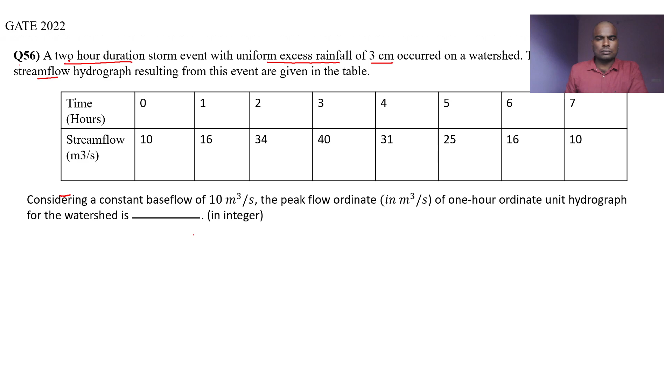This question is as follows: a 2-hour duration storm event with a uniform excess rainfall of 3 centimeter occurred on a watershed. The ordinates of the streamflow hydrograph resulting from this event are given in the table. Please note down, this is a 2-hour duration storm event with a rainfall excess of 3 centimeter, and this particular event resulted in the stream flow hydrograph of these ordinates.

The question is to consider a constant base flow of 10 meter cube per second and calculate the peak flow ordinate in meter cube per second of the 1 hour unit hydrograph. Please note, they asked to calculate the 1 hour unit hydrograph. In the question they have given a 2 hour storm event and corresponding hydrographs, but they have asked you to calculate the 1 hour unit hydrograph. And this question is for 2 marks.

Since this question is for 2 marks, we need to do some computations to solve it. Before proceeding further, I wanted to ask you guys, does anybody have an idea how we can solve this question? Anybody willing voluntarily, you can respond, it need not be exact.

So, a 2 hour duration storm event with a uniform excess rainfall of 3 centimeter on a watershed. The ordinates of stream flow hydrograph resulting from this event are given below, and additionally they have mentioned that a constant base flow is to be considered. So it has asked to calculate the peak flow ordinate in meter cube per second for the 1 hour unit hydrograph.

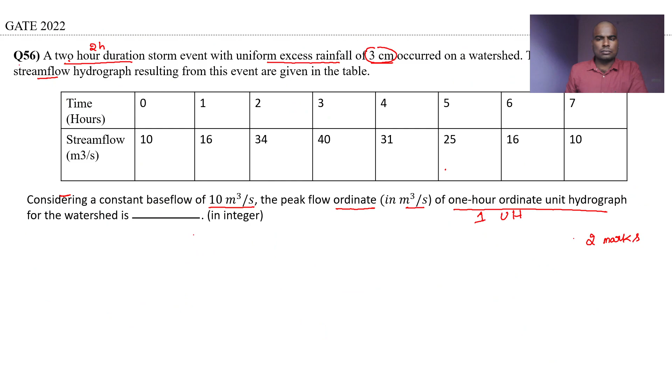Now let's deduct the base flow to get the direct runoff hydrograph. Why are we deducting the base flow? Because this base flow is not from the current event - it may be contributed by groundwater, or from a previous event. Our intention is to calculate the unit hydrograph for this excess rainfall amount, so we will remove the base flow from this.

By removing the base flow: 10 minus 10 will be 0. 16 minus 10 will be 6. 34 minus 10 will be 24. Similarly for all other steps.

Here you can see 25 minus 10 will be 15, 16 minus 10 will be 6, 10 minus 10 is 0. Please note down, in the direct runoff hydrograph, the first ordinate and the last ordinate will be 0 only, and this will even continue for the unit hydrograph also - the first and last ordinates must be 0. Please note, if these ordinates are not 0, then you might have made some mistake, so please check that. Now column 4, here I have written the formula for how we got this.

So column 4 will be column 2 minus column 3. Column 2 is the stream flow and column 3 is the base flow. By deducting these elements element-wise, we get these values. Now to get a 2-hour unit hydrograph, we need to divide column 4 by 3 centimeters, because this is a direct runoff hydrograph which resulted from the 3 centimeter rainfall excess.

I hope all of you know the definition of unit hydrograph. Unit hydrograph is a hydrograph which resulted from uniform rainfall intensity over an entire catchment.

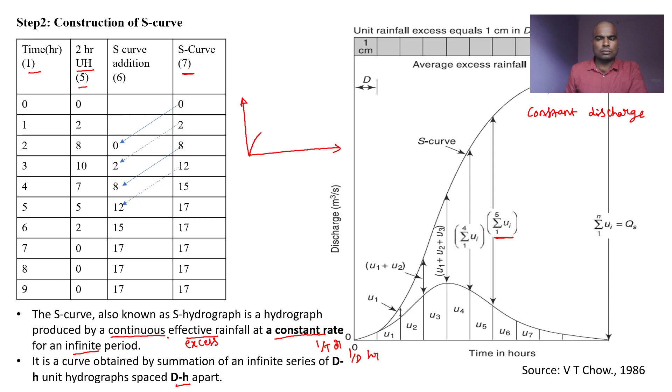Let's say this is the 2-hour unit graph we already got from the previous step. Let's say I have lagged this unit graph by 2 hours and performed this sum. So let's say this is 1, 2, 3, 4 - correspondingly this will have one value, this will have another value, and so on. If you observe between 0 to 2, whatever values are there will directly appear in the S curve. But from the second period onward, these values will get summed up. Can you note it down? Please observe, this is a critical point here.

In this question, they have given ordinates at 1 hour interval, but the unit graph what we have is a 2 hour unit graph. This is where we all make mistakes. Many people will simply lag these 2 times and add all the points. That is not correct. Please note down.

So observe critically. What I'll do is take these first 2 ordinates and directly put them in column 7. Now these 2 ordinates I'll shift together and place here in column number 6. This column is called the S curve addition. Now sum these two and place here: 8 plus 0 is 8, 10 plus 2 is 12.

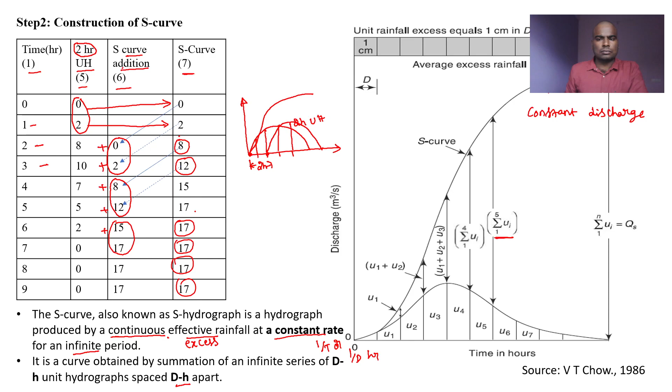So this is step 2. Now this is the final step. We have the S curve, and from the S curve how can we generate the T hour unit graph? It is the same procedure I demonstrated earlier. Consider two D hour S curves A and B, here 2 hour, displaced by T hour. In our case we need a 1 hour unit graph, so T will be 1.

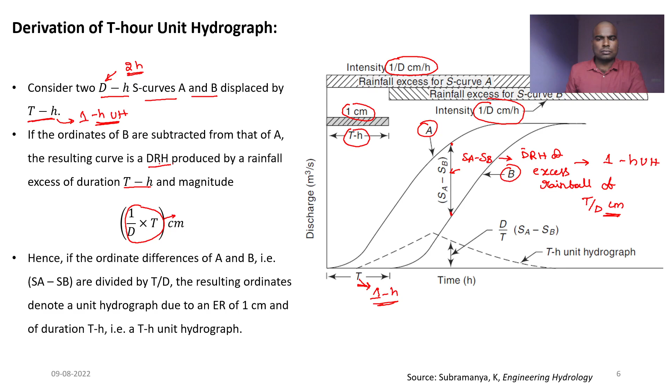Now from this DRH, with T being 1 hour in our case, we need to calculate the 1 hour unit graph. We simply divide this DRH by the T/D excess rainfall depth, and we get the T hour unit graph. This is the procedure.

Observe the column numbers again. In the previous step I stopped at column number 7, so I start with the same column 7. Time is 0, 1, 2, 3, 4, 5, 6, 7. I have added 2 extra rows because we are lagging the curve, just to be on the safer side, but these ordinates will be 0 only, so there is no issue. This is the S curve obtained in the previous step: 0, 2, 8, 12, 15, 17 and so on.

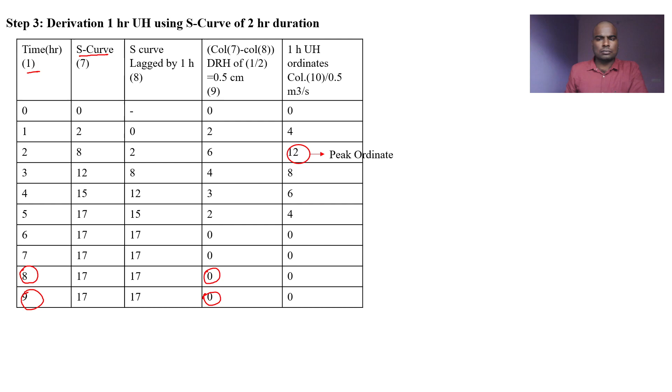Now lag this S curve by 1 hour because we are asked to calculate the peak ordinate of the 1 hour unit hydrograph. If asked the peak ordinate of a 3 hour unit hydrograph, we would lag by 3; if 2 hour, in a similar manner. So we have lagged by 1 hour, and these ordinates go here.

Now we deduct column number 8 from column number 7. 0 minus 0, 0 minus dash is 0 only. 2 minus 0 is 2. 8 minus 2 is 6. 12 minus 8 is 4. Similarly the others. So this is the DRH of 0.5 centimeter excess rainfall.

So now we need to calculate the 1 hour unit hydrograph. So how will you get the 1 hour unit hydrograph? This is column number 9. Sorry, this is my mistake. This is column number 9, and this is column number 10. So divide column number 9 by the 0.5 centimeter. By doing that, we will get the ordinates. So if you observe, what is the peak ordinate here? 12. So this is what they have asked to calculate.

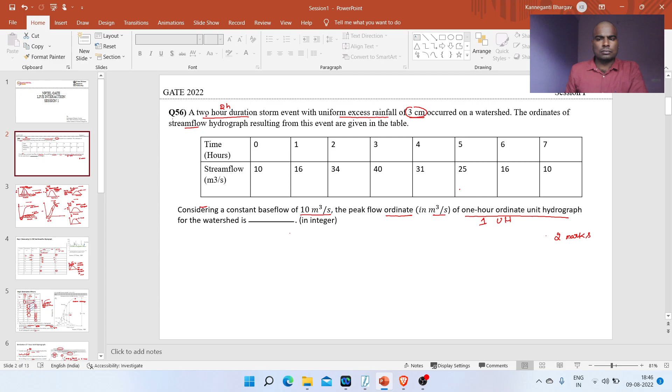So if you observe what they have asked, they have given a 2 hour storm event and the 2 hour stream flow hydrograph, but they have asked you to calculate the peak flow ordinate of the 1 hour unit hydrograph. If you observe column number 5, this is the 2 hour unit hydrograph which we calculated from the stream flow. Observe this carefully. You subtract the ordinates of the 2 hour unit hydrograph only.

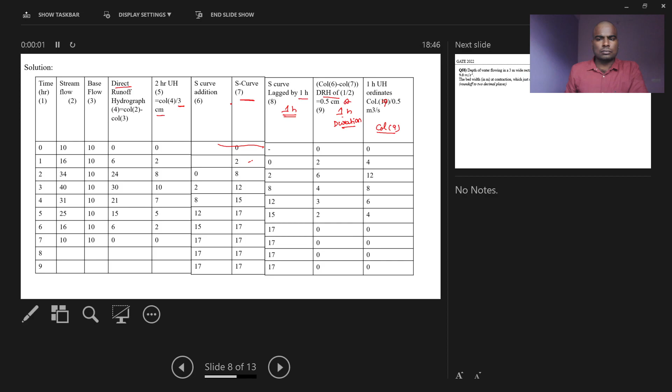I mean, 0 minus 2, how much is the difference? 2. 2 minus 8, how much is the difference? 6. 10 minus 8, how much is the difference? 2. Similarly, other steps. So what is the maximum difference you got here? 6. They have given the 2 hour unit hydrograph, but they have asked you to calculate the 1 hour unit hydrograph, isn't it?

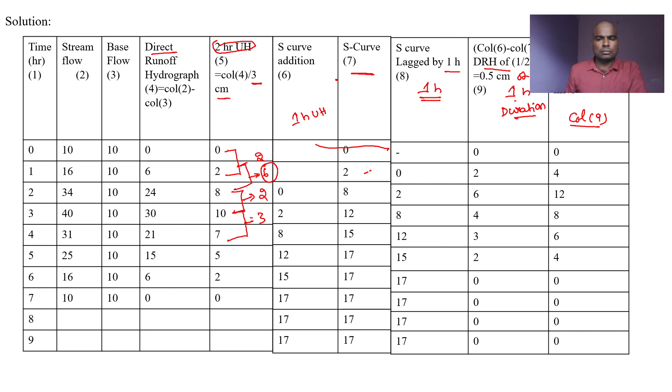So what you can do is divide this 6 by 1 by 2, equal to 12. This works for the peak flow ordinate. This will be the shortcut. So you will look at the difference of the ordinates, pick the maximum difference, and divide by this. Here it is 6, and they have asked t by d directly. So 6 by t by d you will get.

Suppose here they have asked you to calculate 4, then it will be 4 by 2. So the answer will be 3 meter cube per second. This will be the peak flow ordinate. Understood?

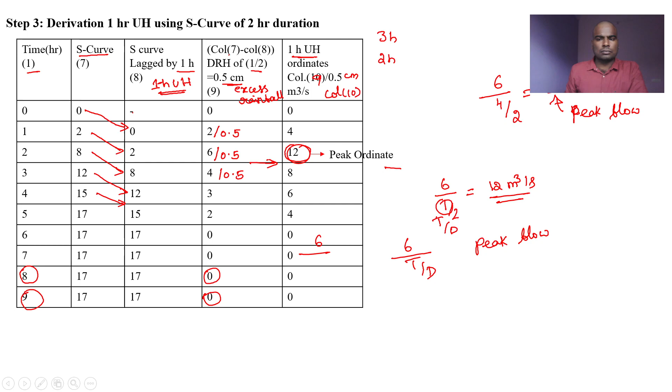I hope I'm clear. Yes, sir, it was clear. So did you understand the shortcut? It will work for the peak flows. Yes, sir, it was interesting. So we just look at the difference between the ordinates, pick the maximum one, and divide by that 1 by 2 or 4 by 2, whatever it is. Yes, sir, it is nice.

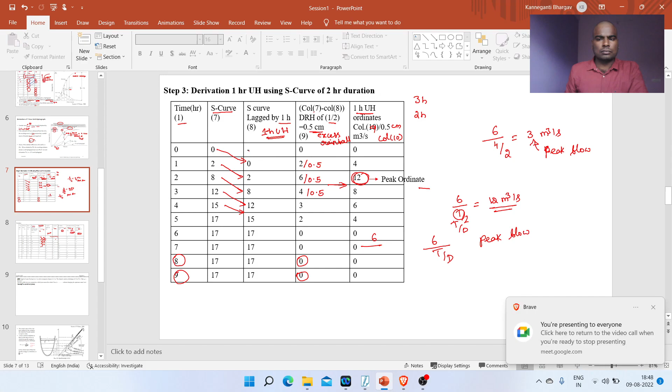Thank you. Let's move to the next question quickly, we are running short of time. So now we'll solve another question from open channel flow.

So this question is 58, question number 58 from GATE 2022 Session 1. In this question, they have asked you to calculate the bed width. So let me read the question carefully.

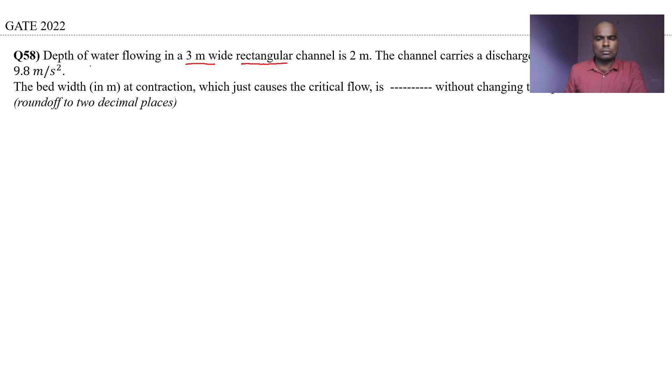Depth of water flow in a 3 meter wide rectangular channel is 2 meters. The channel carries a discharge of 12 meter cube per second. Take acceleration due to gravity as 9.8 meter per second square. This is the given data.

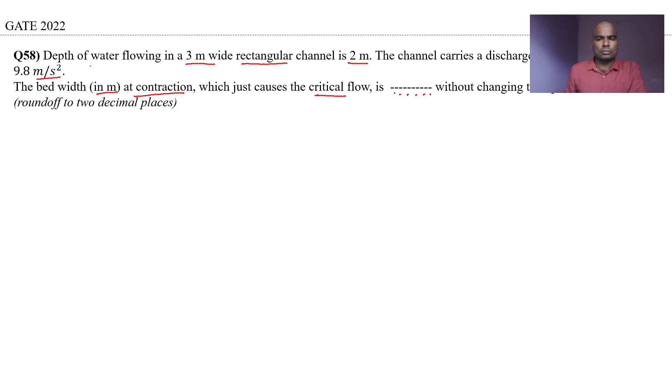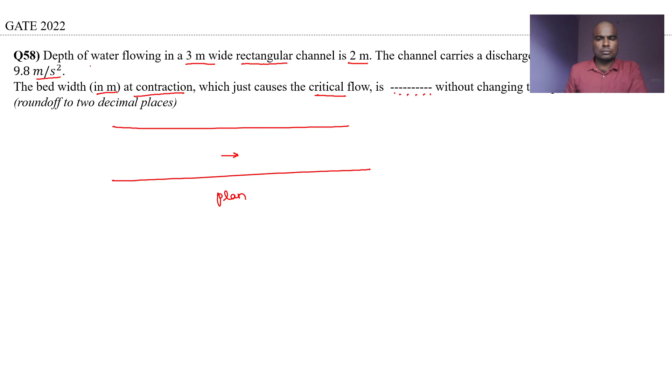Now the question is: the bed width in meters at a contraction, which just causes critical flow, without changing the upstream water level, is how much? So let me explain what they have asked in this question. Imagine this is a channel in a plan view. Let me draw another thing. So this is a sectional view.

So how much is the width? They have mentioned 3 meters, and the current depth of flow is 2 meters. Let me take this as section 1, and let me mark this as the critical section C. Now what they have done is that they wanted to reduce the bed width.

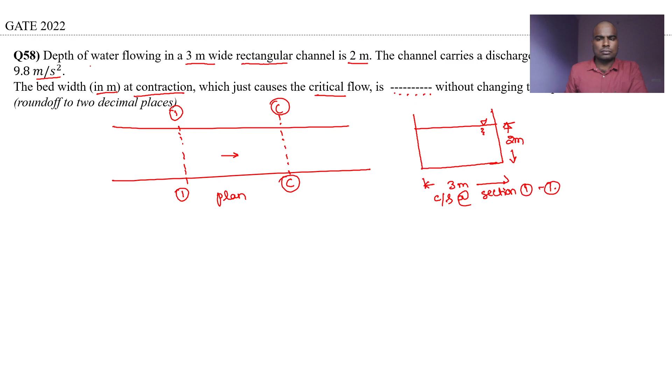Let's say this is B minimum. Now they have asked you to calculate this value without changing the upstream water level, which means that the channel should carry the same discharge Q, but it should have a minimum width.

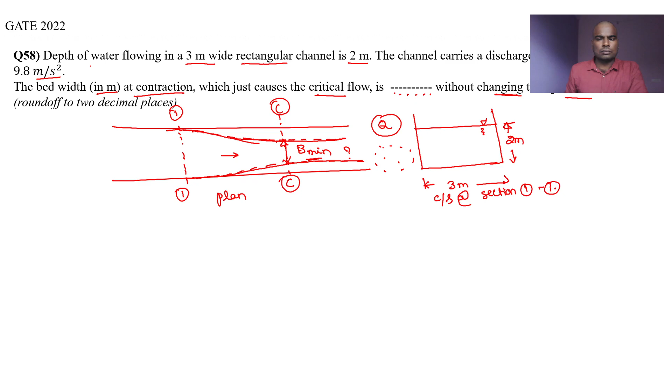We perform these kinds of actions when we want to reduce the cost of construction and other things. But we need to serve the purpose also, because if there is any cropland downstream of this channel, we should supply the same amount of discharge for the crops. If we want economy, we perform these kinds of actions. So let's see how. Let me give you the theory part here.

The critical state of flow is defined as the condition for which the Froude number is equal to unity. I think all of you know what a Froude number is. Froude number will be V upon root of gY, nothing but inertia force by gravitational force. This I have written for the rectangular channel.

The more general formula will be Fr square equal to Q square T by g into A cube. This is a more general formula, but for the rectangle we can simplify it as V by root of gy. In this case, the Froude number will be 1 for critical flow. A more common definition is that it's the state of flow at which the specific energy is minimum for a given discharge. So what is specific energy?

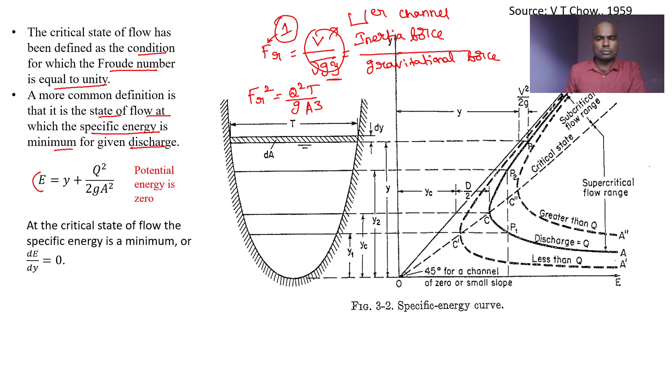Specific energy is nothing but energy per kg of water at any section of the channel measured with respect to the channel bottom. We have potential energy, kinetic energy, pressure energy. In the open channel case, we call this the specific energy, and we take the potential energy as 0 because we measure with respect to the channel bottom. So Z will be 0. This will be the velocity head, and this is the pressure head.

At the critical state of flow, the specific energy is minimum, nothing but dE by dy equal to 0. By solving dE by dy equal to 0, we get a relation between Ec and the depth of flow. These derivations are out of scope now. Just remember what the critical state of flow is, because they may ask this in one more question. At the critical state of flow, the specific energy is minimum for the given discharge.

Imagine B minimum is the minimum width of channel for which flow is possible without any change in upstream flow condition. In the question they have asked us to calculate the width of channel without changing the upstream flow condition, so we should keep this point in mind. So how can we calculate B minimum? We have this formula, which I have shown you already.

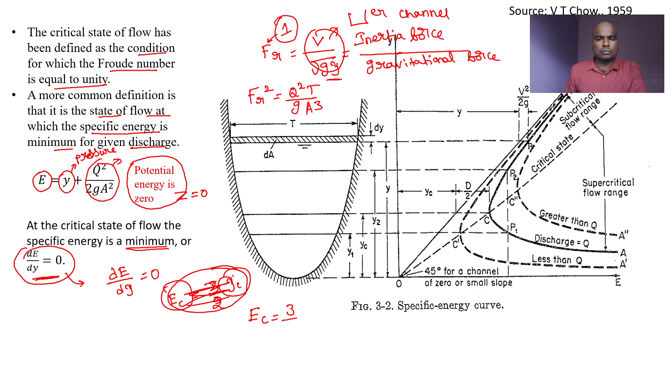and YC. So it will be 3 by 2, not 1 by 2. Sorry, EC will be equal to 3 by 2 of YC. This derivation you can find in any textbook, but this is out of scope now. So just remember this formula: E is equal to 3 by 2 of Y. So we will get this particular equation, and from there we can reshuffle the terms, and we can get B minimum as square root of Q square by G into 2 by 3 of EC whole cube.

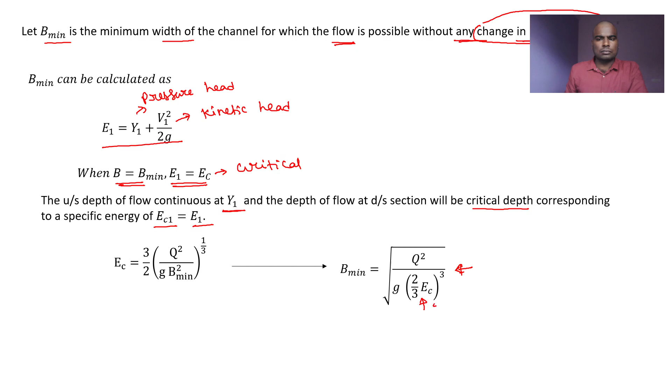Remember this formula and note down this formula. This formula may be useful to you. Here this 2 by 3 EC is a Y. Okay. So now solve the questions. So depth of water flowing in a 3-meter wide rectangular channel is 2 meter. So here width is 3 meter at section 1 and depth is 2 meter. The channel carries a discharge of 12 meter cube per second, and the G is 9.8 meter per second square. So this is acceleration due to gravity.

So they have asked you to calculate what is the bed width at a contraction which just causes the critical flow, which means that E is EC, just a critical flow. So first let us note down the given data. Given Y1 is 2 meters, B1 is 3 meters, discharge is 12 meter cube per second, acceleration due to gravity is 9.8 meter per second square. So step 1: you need to calculate the specific energy at upstream section. E1 equal to Y1 plus Q square by 2 into G into A square.

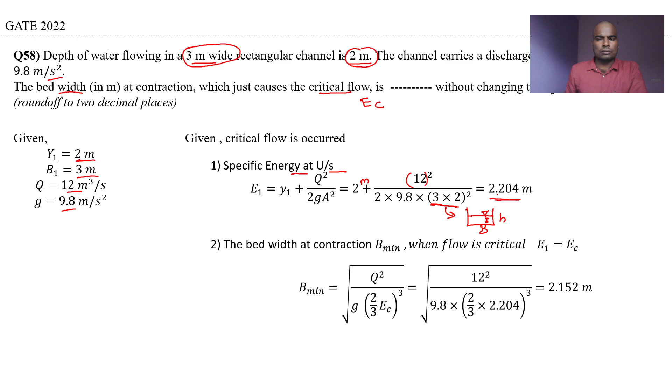So you will write 2 meter depth plus 12 square divided by 2 into 9.8 into, here area of rectangle will be B into H. So here it is like depth, we need to calculate only flow depth. So 3 into 2 whole square, it will be 2.204 meter. So once you know the E1, when B equal to B minimum, E1 will become EC. So with this condition, we will use the same formula I have shown you in a previous slide. So the bed width at a contraction B minimum when the flow is critical, E1 equal to EC.

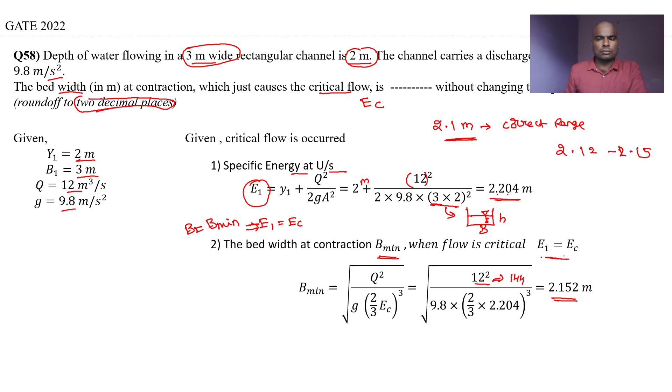So by substituting all these here, 12 square equal to 144, divided by 9.8 into 2 by 3 into 2.204 whole cube, we will get 2.152. Here you see, this is also one mistake we make. They told round off to 2 decimals, but here I have shown you 2.152 meter. So please note down, when they specifically mention 2 decimals or 3 decimals, you always mention those decimals. Suppose if you mention 2.1 meter, sometimes the correct range may be 2.12 to 2.15. Then you may be wrong. So please read this particular point carefully and answer accordingly.

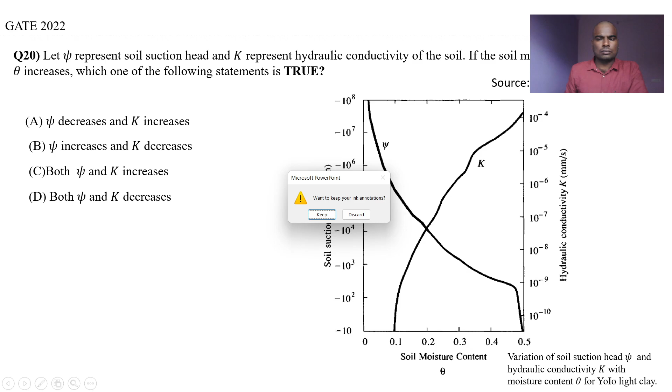So soil suction head is nothing but the pressure, and K represents the hydraulic conductivity of the soil. This is a property of the soil. So how do both vary with respect to the soil moisture content? Imagine the soil moisture content is increasing. Observe this x-axis, 0 to 0.5 and so on. When the soil moisture content is increasing, the hydraulic conductivity of the soil is increasing, whereas the soil suction head is decreasing. So what is the correct answer here? Psi decreases and K increases. Option A. Okay.